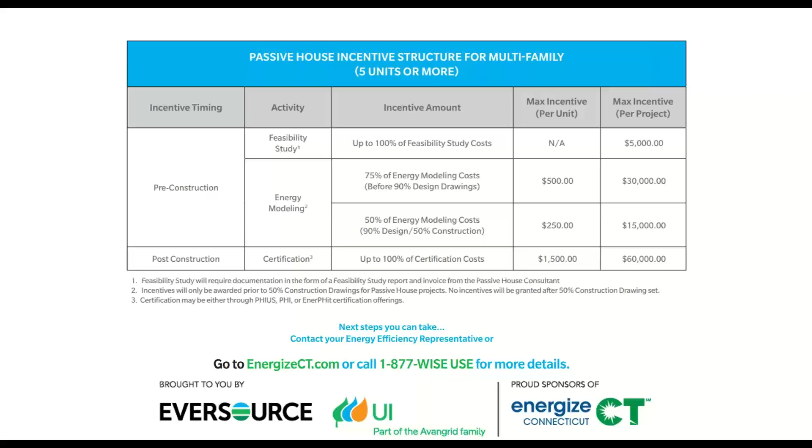Next one: the all-electric incentive is for both single-family and multifamily buildings. It offers 2 levels of eligibility with specific design and performance requirements associated for each, and has incentives ranging from $1,500 a unit for multifamily all the way up to $10,000 for single-family homes.

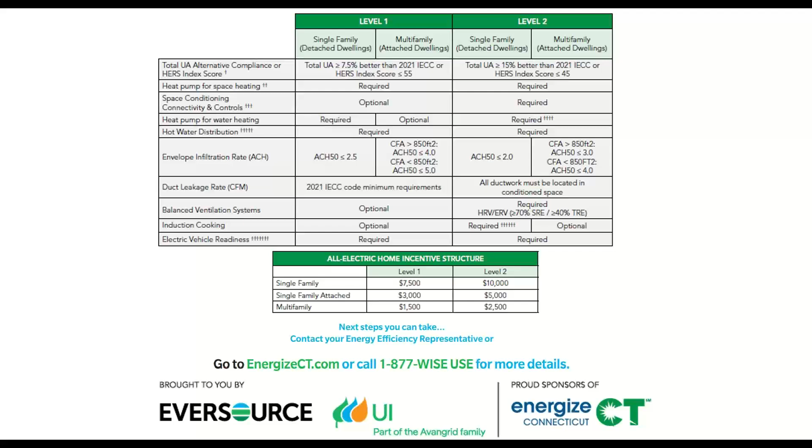Our goal is for everyone involved in the construction of residential buildings in the state of Connecticut to be aware of these incentives. So if you're interested in learning more, please visit our website or contact us directly.

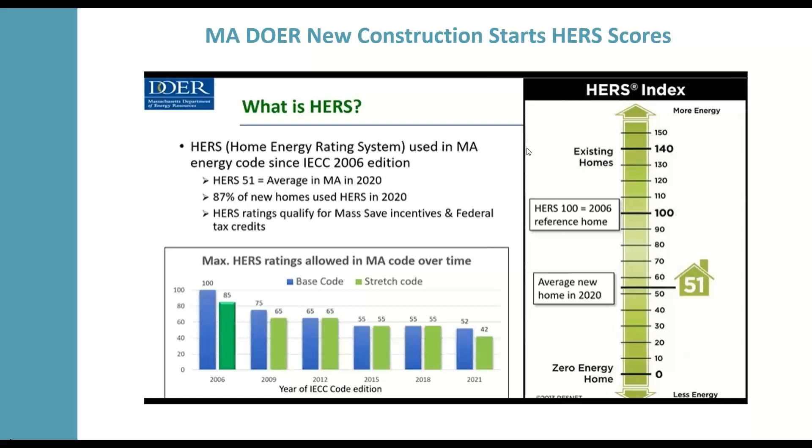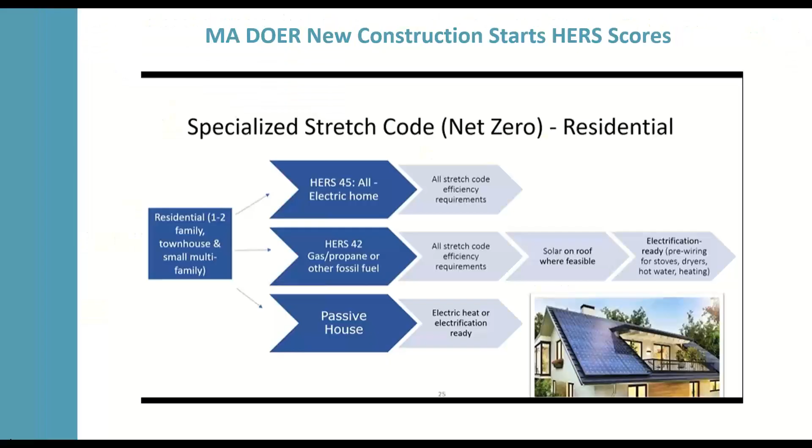And it's not that rare of a story. When I said the best performing homes are in that 30 to 40 range, that's before we're taking renewable energy into account. You put solar panels on the roof of those homes, and now they can provide all the energy they need. In some cases, they produce extra power, more than that home needs. We call it net positive, and it's amazing. Can you imagine, instead of getting a utility bill, you're actually sending the utility company an invoice for the power you're producing and sending back to the grid, and they pay you for it. It's amazing what's going on in the marketplace right now.

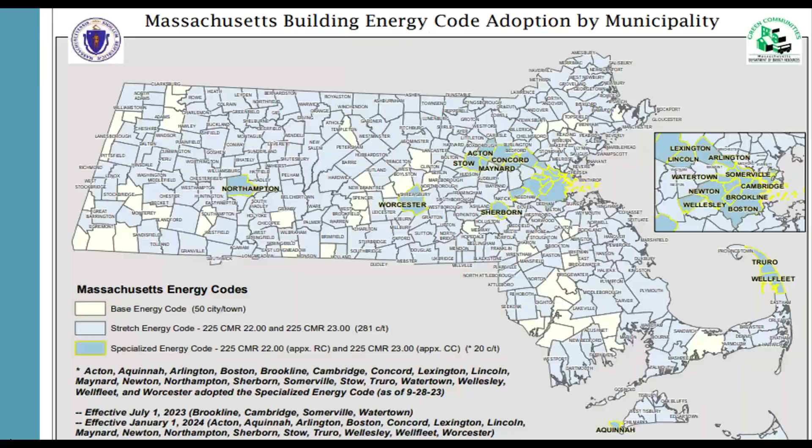So I was just going through a few different slides here. We have a few about some code changes in Massachusetts. I'm going to skip over that for a moment—we can come back because there's some code discussions we can have around the building code for folks who are interested. But I want to highlight this and talk about the growth we've been seeing. Today we're going to go between a few different terms: high performance, passive house, and more specific passive house terms like PHIUS.

High performance, we'll give a definition later, but we simply usually mean energy performance—homes with a lower HERS score would be a high performance home. Passive house is a specific certification you can achieve when a house has significantly low energy use. PHIUS is the largest certification body here in the US for certifying those homes. So when we say a house is PHIUS certified, that means it went through a passive house certification.

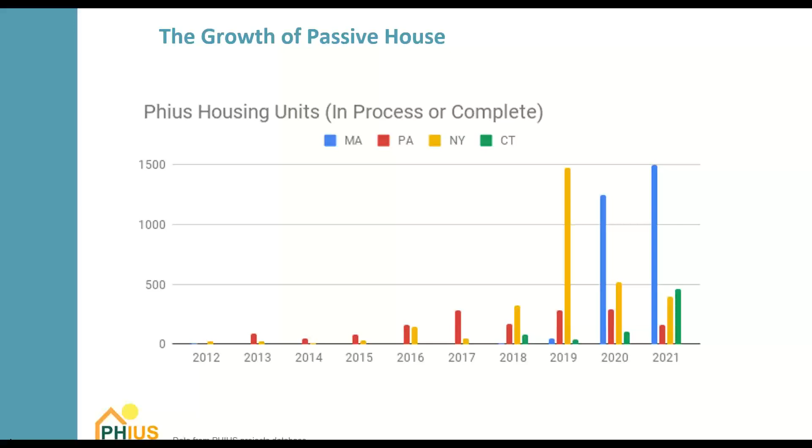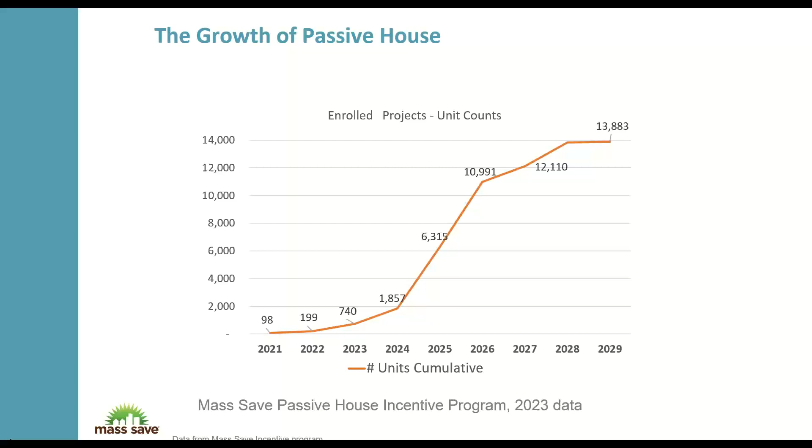So we expect Connecticut to experience similar growth in passive house due to the incentives that have been rolled out there now through Energize Connecticut. I don't have that data here to share with you today, but I hope in the future we'll have it and can show you this dramatic increase in passive house projects in Connecticut due to those incentives.

I have a couple slides here. I just want to talk about overall costs. There are a lot of questions that come up around building these higher performing buildings - does it cost more to build them? Maybe we'll save some money in the operation of them, but what about that upfront cost to actually construct them?

And they tracked where this came from. Some of this incremental cost came from using a higher quality ventilation system, some came from using better windows. So that might be where they saw some of the costs. But this is what they experienced, and this data is now actually a couple years old. We haven't gotten to the point of having concrete data yet, but what we're hearing from projects under construction is that this number is getting closer and closer to 1%, closer to 0%. Basically, passive house is becoming just another decision a project makes, not a huge cost driver.

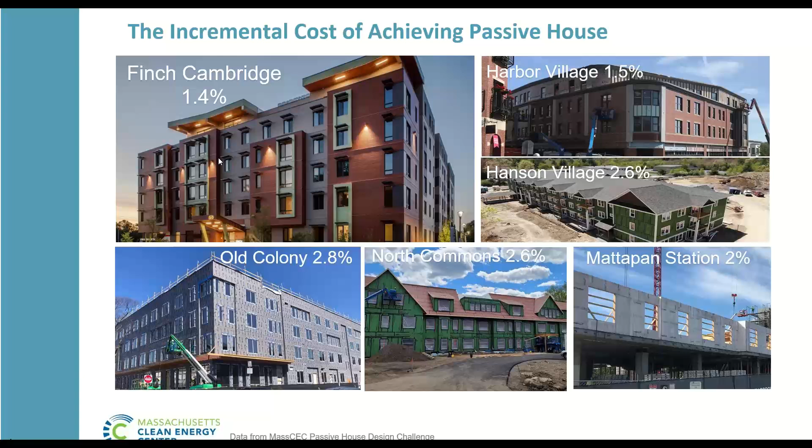Some of these projects actually noted that. In fact, the Mass CEC put a report together of these projects where they listed what cost more and what cost less. The HVAC system, not the ventilation system, but the heating and cooling system is where they saved money. Pretty incredible, just because they were able to have a smaller size heating and cooling system.

I have a couple more pieces of data as well. This is Pennsylvania. So if you guys noticed on the graph a little bit ago when I was talking about the four Northeast states that are leading the way, Pennsylvania is one of them. Part of that is that Pennsylvania took one of the first steps to incentivize passive house projects, specifically projects being awarded affordable housing financing through the PHFA, the Pennsylvania Housing Finance Agency.

So what we have here is some data showing you the cost of those projects, comparing the cost of projects that went through affordable housing financing that were passive house compared to the ones that were not passive house that went through this financing. And what you're looking at on this graph is... oh sorry, I have to move something on my screen so I can see.

The ones in sort of your orange color were the passive house projects that were awarded funding. The ones you're seeing in gray color are the non-passive house projects that were awarded funding. You're looking at the costs on the Y axis, so cost per square foot, and the square footage on the bottom, so you can see the size.

But the main takeaway, if you look at this, is the scattering of it. Passive house projects are all over the map, just like the non-passive house projects are all over the map. The reality is passive house was not the main driver of costs in any of these projects. Some of them were more expensive, some were less expensive.

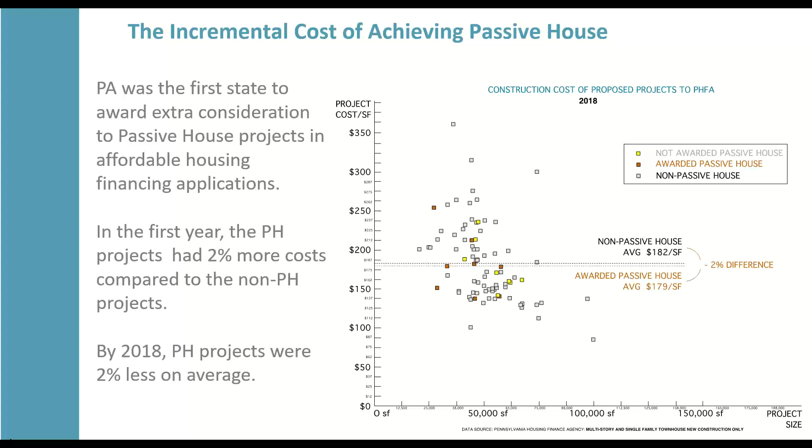Maybe you might be using some newer materials, and we'll talk about some of that. But a lot of it is the contractors, the trades, they get excited about this because their job matters a lot more than it does on a typical project. The quality they put into it makes a huge difference. Well, getting the subs on board, the framers, everybody has to be on board with this stuff.

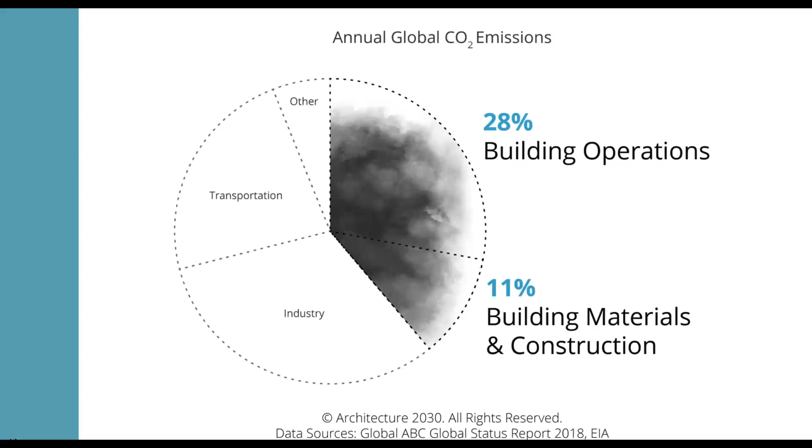This gets a little bit more into the buildings we were talking about. We're diving into building operations and building materials. So when we say buildings use almost half the energy, this is what we're looking at. This chart is specifically showing global emissions as opposed to US emissions, but you can kind of see it there.

So what I want to get into a little bit here is what I hinted at earlier, where are we focusing on in buildings? Because I don't want to make it seem like we're asking homeowners to change the way they live or to use less energy in their daily lives and what they experience. We're trying to make their home more efficient. And you can see why.

This is the Northeast, so this includes Connecticut and the whole Northeast region. How do homes use energy? The orange piece of that pie is space heating, that's nearly 60%. So in a residential single-family home in the Northeast, around 60% of the total energy we use goes to heating our home. That's it, it just goes to heating. Whether we're using our natural gas boiler, an old oil system, or even a new efficient system, average is 60% of our energy is space heating.

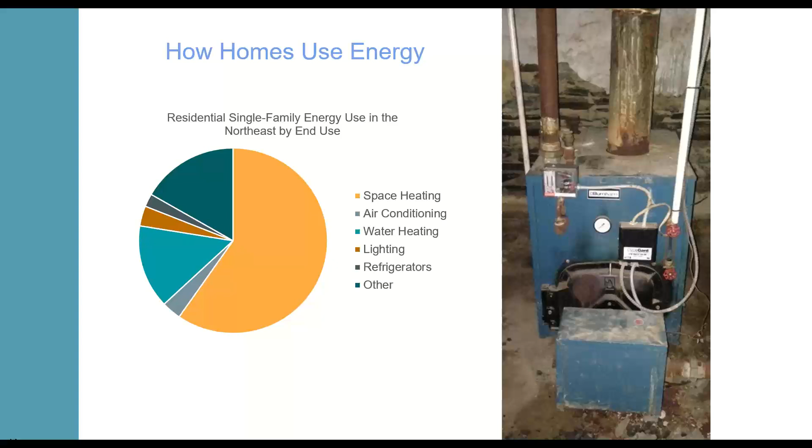And then you can see a little sliver of gray, which goes to air conditioning systems. And then we have water heating, of course, which takes up a large chunk as well, and a few other things. But if we really want to reduce the energy demand of our buildings, what you can see by this chart is we're not going to focus on lighting, we're not going to focus on refrigerators and other appliances. What we are going to address is space conditioning, and really in the Northeast it's heating more than anything else, reducing the energy we need to heat our buildings.

Can I just make a comment on that, from a real estate perspective as well? We've been in a very aggressive market over the last 3 or 4 years in particular, in which buyers have no leverage in the real estate transaction. They're competing against multiple offers.

They oftentimes have no opportunity for a home inspection. They waive their right to a home inspection just to compete in this marketplace. I've even seen home buyers waive their right to a mortgage contingency, going straight to lenders. Crazy stuff just to land a home in the Northeast.

Any buyer could look at this system and say, that's at the end of its natural life, this natural gas heating system that's here. What am I going to do when that thing goes out? It's not going to be very long before I have to deal with that. I don't need a home inspector to tell me this, right?

So one of the things that gives my buyers a great sense of relief is the incentives out there, including in Massachusetts, we have the heat loan, which is 0% financing for energy efficiency improvements. If homeowners know about these incentives through the IRA or the Energize Connecticut programs, you can give your buyers real peace of mind that there's a way to approach this after they own the property, after the point of sale, by giving them the resources to get the job done right and take advantage of ridiculous incentives to handle some of these readily apparent problems.

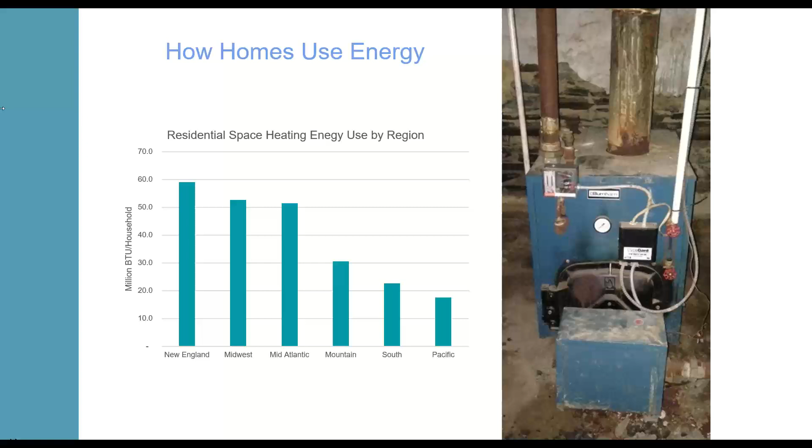This chart shows that same data but compares different regions, and the takeaway should be clear: New England uses the largest amount of space heating energy. The numbers here are in million BTUs per household. New England homes on average use nearly 60 million BTUs per house for space heating, more than any other region. That's why practices like passive house and other high performance building standards have taken off here more than in other parts of the country, because we need it here more.

Now we're going to get into high performance standards and rating systems, because there's a lot out there. I imagine everyone on this call is familiar with LEED or Energy Star, but other standards and rating systems exist too. They all try, in their own way, to improve buildings and homes, provide a standard to measure against, and a way to certify that a building meets that standard.

Most folks are familiar with LEED. It has a checklist of things you can do during design and construction to meet requirements and become certified if you achieve enough points. Those points cover a wide range of categories: energy use, site treatment, water use, and other sustainability aspects. So LEED becomes a holistic sustainability standard, covering a lot of ground.

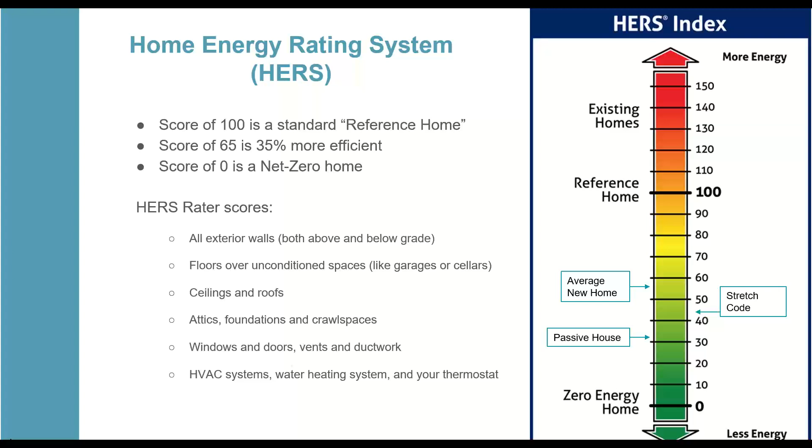So LEED can sort of be all over the map in terms of energy performance. Passive House, and the reason why it's become more of a well-known standard and more widely used, is because it focuses specifically on energy performance. It zeroes in and sets criteria for annual heating and cooling demand. So how much energy are you using in the building to heat it? How much energy are you using to cool it?

It also sets specific standards for whole building air tightness - how airtight is that building envelope? We want to measure that and have a goal for what we want to achieve. And then it also sets standards for source energy demand - that's just a way of talking about overall energy use of the building. So if we take heating and cooling demand and add every other source of energy in the building, we want to make sure that doesn't go over a certain limit as well.

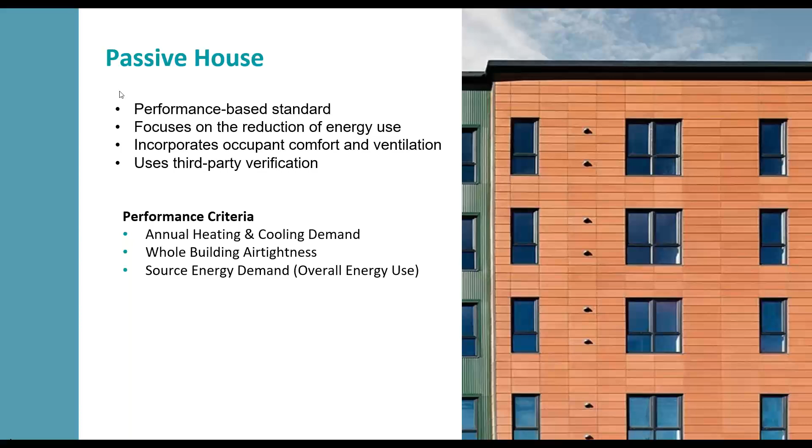But it was based on ideas that had started to be implemented way back in the 70s with concepts around super insulated homes. That worry of, well, homes need to breathe, that really came out of these original super insulated homes, because in a lot of cases these homes did not have the modern ventilation systems we use now. So they may have encountered problems with that lack of airflow concept that we don't experience now. But the main ideas of Passive House came from that.

The first use of Passive House in print was actually a home in Shrewsbury, Massachusetts, right here in New England. But then Passive House sort of came around the mid-90s, started in Germany as a European standard, and then expanded here to the US in the 2000s.

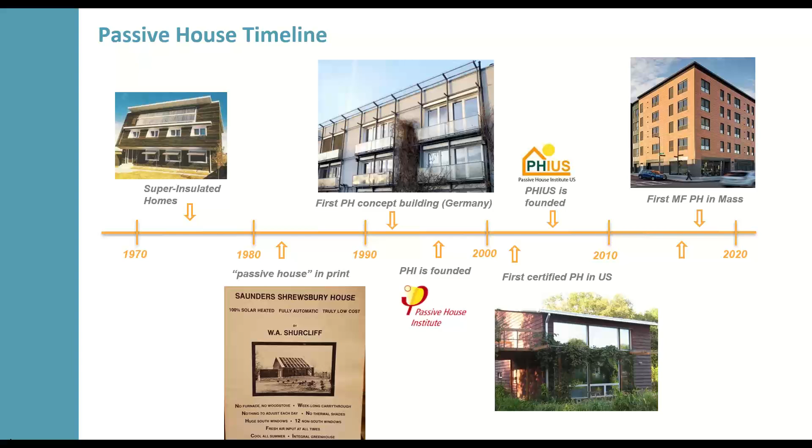So this stuff has been around in the marketplace for a while, but it's really the way Passive House has put this together in terms of a certification setup and to move the market that is really impressive here.

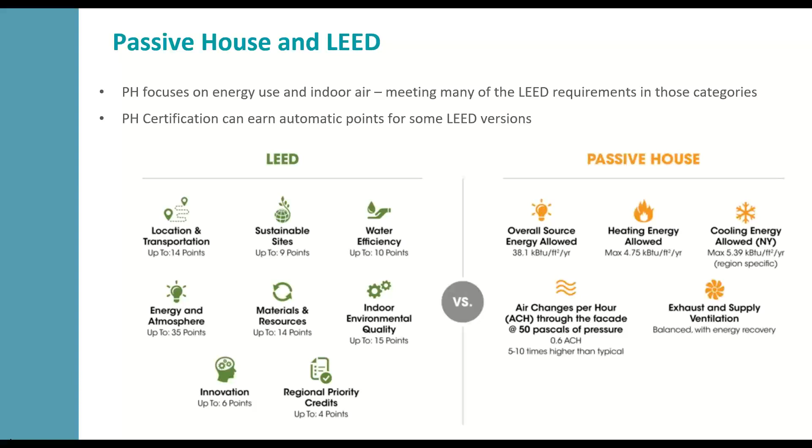So Passive House and LEED can be very complementary to one another.

And this is showing you PHIUS specifically, which is one of the two Passive House certification platforms, PHIUS and PHI. This is showing you how PHIUS also incorporates other standards that already exist.

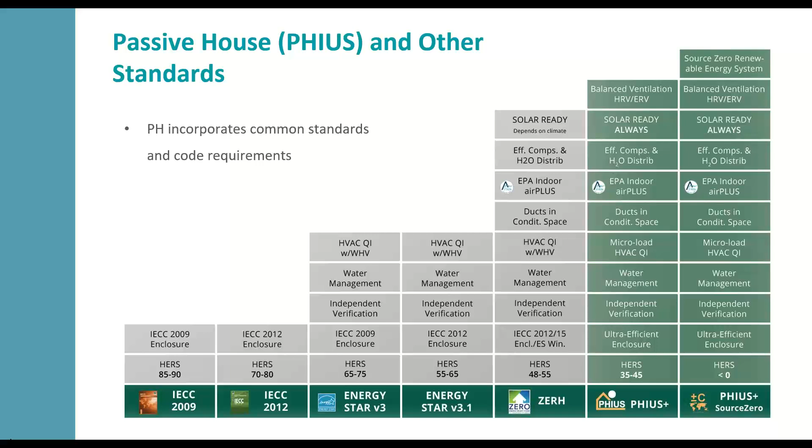It incorporates the base building code, Energy Star certification, Zero Energy Ready Home certification. It also incorporates Water Sense, which is, I believe, an EPA program. So there are a few other standards that exist out there that if you're building a new home, you may need to take into account. PHIUS tries to incorporate all those things, so it's not competing with these other standards. It's not trying to cause confusion or complications. It's trying to build these other required things into the system. Make it easy.

So I talked a lot about what Passive House does. Well, one of the things is the air tightness standard. Some of you this might not mean anything to. If you don't understand what air changes per hour at 50 pascals of pressure are, that's okay. But if this does mean something to you, you'll notice it's pretty dramatic. Generally, the base building code asks for around 3 ACH 50. This is just a measure of how airtight that building is. Every building has to meet some type of air tightness, but 3 is not a very airtight building—it simply has some air tightness. Passive House requires that to go down to 0.6 ACH 50, which is a pretty dramatic improvement. You'll notice that's not completely airtight, but it's a pretty dramatic improvement.

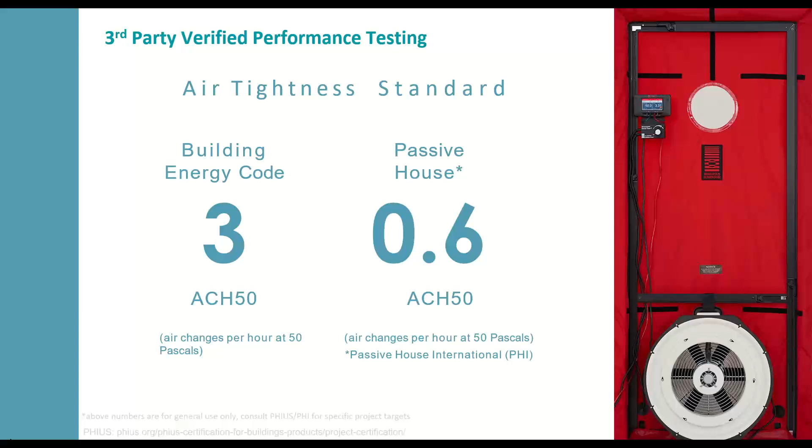Exactly. So we translate all of the stuff into benefits, which is clearly I think the main benefit you'll experience here is that top line, third-party verified performance testing. These buildings are tested. We know how they perform because we measure it and test it. Other buildings don't have that. So that's one of the benefits you get from something like Passive House certification—you know what this building is going to achieve, because somebody else tested it for us.

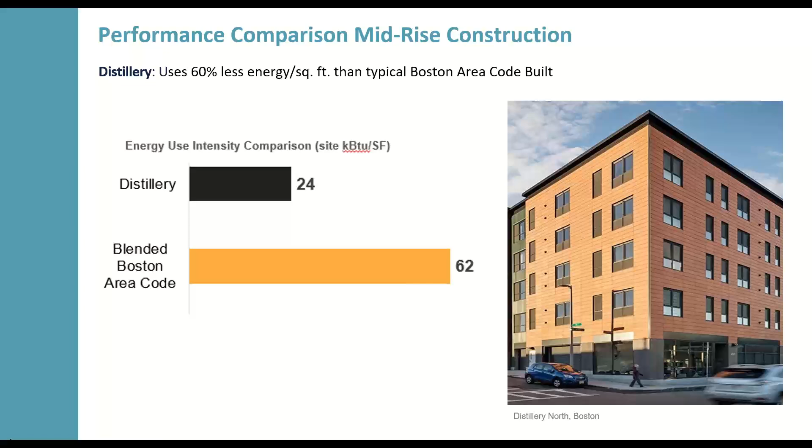I'm just going to show some performance comparisons. So this is energy use. These next few slides are just so we can all understand when we say a passive house uses less energy, what does that mean? This is a multifamily passive house building in downtown Boston. The numbers we're looking at are something called EUI—that's just the total kBTUs of energy the building uses divided by the square footage of that building. This building, called the Distillery, has a 24 EUI. The general mid-rise construction in the Boston area averages 62. So this building uses 60% less energy than a comparable building in this area.

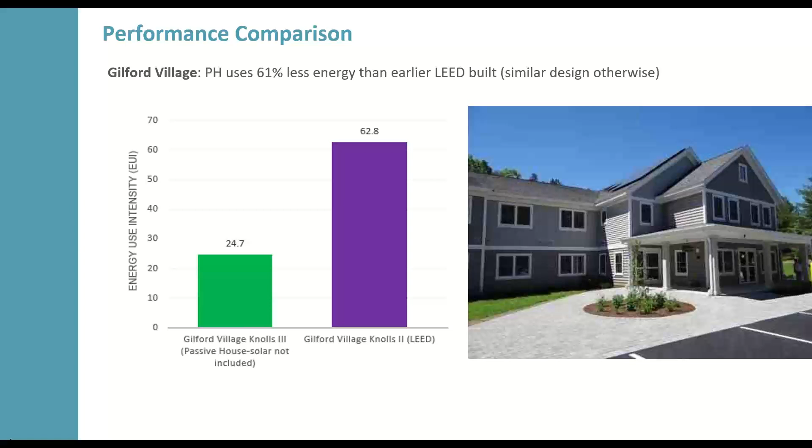This is a project in New Hampshire, built in 3 phases as senior housing. The first phase we don't need to worry about. The second phase was built to achieve LEED standards. The third phase was built to achieve Passive House. Otherwise, they're similar—similar number of units, similar size, architectural features. They were designed pretty similarly, except the third phase went ahead and achieved Passive House. That third phase uses 61% less energy than that LEED certified second phase. So pretty dramatic improvement just by going to Passive House.

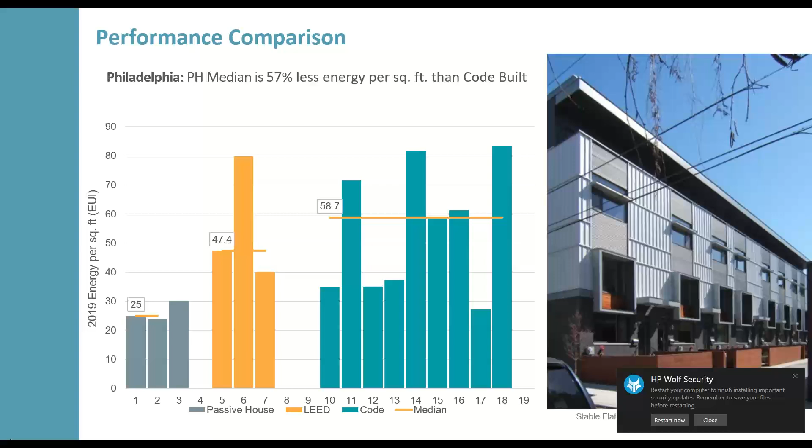With Passive House, you're not going to have that variability because that performance is the requirement. You have to do it. So it's not a guess to say maybe this building will be 57% better improvement.

No, we know it's going to be. And that verification piece is important in the marketplace too, because every realtor, every builder, if you ask them, built the best homes in the face of humanity. But we really don't know that unless it's verified. And I think the third-party verification part of this, the performance testing, is something that in doing open houses, we can make buyers aware that this is third-party verified.

And there's some real value to that, compared to the typical builder out there. Exactly, that verification is so critical. And it allows us to hopefully start to include data like this in the MLS and other resources so people can actually see this data that's been third-party verified.

This is showing you three different smaller projects. These are all Massachusetts projects. The one on the bottom is that house in Wayland we talked about. The one on the top is a net zero passive house in Lincoln, kind of a farmhouse style. And the one in the middle is actually a single-story office building in Newton called the Studio. So you can see how these buildings perform.

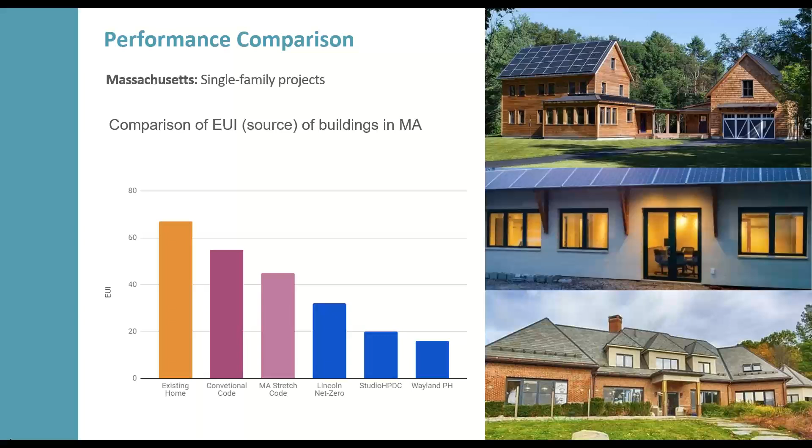One thing I'll note is the EUI in this case is without solar being taken into account. You can see the solar panels on the farmhouse and on that office building, so right now we're not accounting for those. If we were to account for the solar, the EUI of those buildings would be zero or negative something, because both of those buildings are net zero and potentially net positive depending on the amount of production. But not even taking the solar into account, you can see how much dramatic improvement in EUI. Pretty impressive data there.

So that was all about energy performance. And that really is, I think, the core of these standards of passive house and high performance buildings - reducing energy demand of buildings. But that's not the only reason to do it, and not the only benefit we see. There's many other benefits.

So one I'm going to talk about now is the concept of durability and resilience. There's lots of different aspects to this, but here's a few of them. One, it means you can shelter in place. We've all either experienced or heard about other people experiencing power outages during extreme temperature conditions. Maybe it's the middle of winter and really cold outside and your power goes out. Maybe it's the opposite - a really hot day in the summer and your power goes out and you can't use your AC or anything else. So sheltering in place means, can we withstand those conditions until they improve, until they're fixed?

These buildings are much better at doing that. I'll show you an example in one moment. We also mean these buildings are more durable and longer lasting. They're being built with better materials and better attention to detail. They're going to resist things like mold, rot, pests, water intrusion, and all of these things that can cause problems to buildings. They're just going to experience fewer instances of this, dramatically.

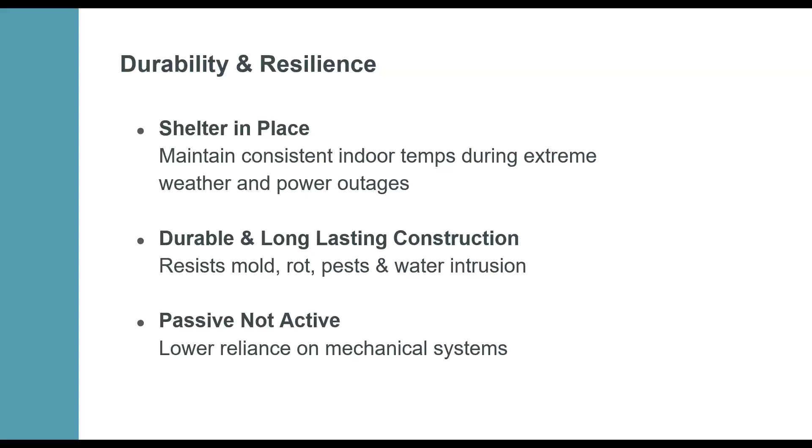Maybe they had a premonition here, but in 2021 a deep freeze happened in Texas. Similar things are expected to happen this coming winter and even this summer, unfortunately, in Texas. They experienced a power outage during this deep freeze - the power went out around 1 a.m. When they woke up in the morning, it was 9 degrees outside, that was the outside temperature. Their home was 62 degrees. Their heating system had not been working since 1 a.m., but their home was still 62 degrees. Their neighbor's house, not a passive house, was already down to 36 degrees.

And the power continued to be out for a while after this. Those neighbors were not able to stay in their home - that was not a comfortable living condition. But the passive house allowed these folks to withstand the duration of that power outage in comfortable enough conditions.

And this is what we mean by sheltering in place. We see similar stuff up here in Massachusetts. Last summer, we had power outages on really hot days in summer. No AC systems were working. Homes were becoming very uncomfortable very quickly, but passive houses were not. They were staying at a comfortable enough temperature.

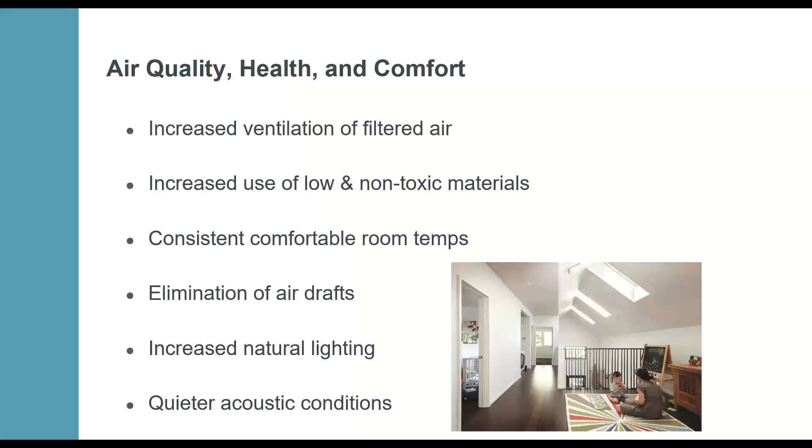And something else - every once in a while I go and tour some of these buildings and talk to the owners or tenants, in the case of rentals, who are living in them, and it never fails, they always mention how quiet it is. It's never a benefit that I think of as why somebody chooses passive house, but everyone living in one mentions that's a benefit to them - how quiet it is. So that's also one, don't forget to mention.

So if you're a realtor out there and you installed solar panels on your rooftop that cost you $20,000, you can take off in your next tax year 30% of that, or $6,000 off what you owe the federal government. That's just one example of the tax incentives out there. A good quick look at this stuff is to Google 'Rewiring America IRA calculator.' They have an Inflation Reduction Act calculator on that website where you put in just 5 inputs - you don't have to put in your email address or anything - and it will spit out very quickly what the tax incentives look like for your income bracket.

Check with your tax advisor before moving forward with any of this, and make sure your tax advisor is giving you consistent information. There are very powerful incentives out there for all of us to take advantage of. And if you as a realtor take advantage of it, you've got a great story to tell your future buyers and homeowners.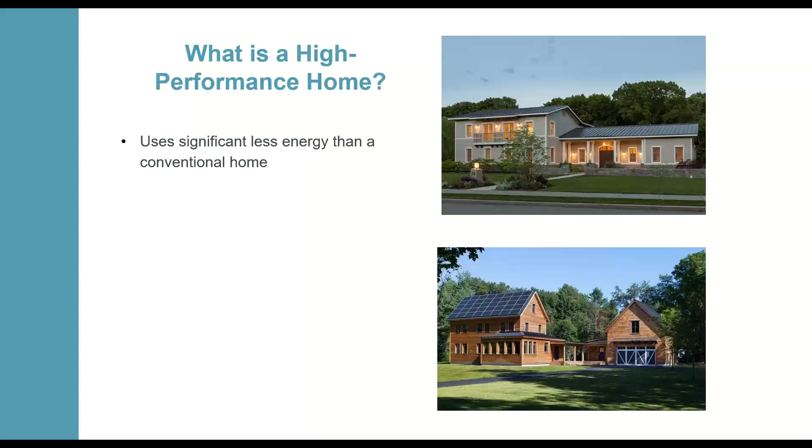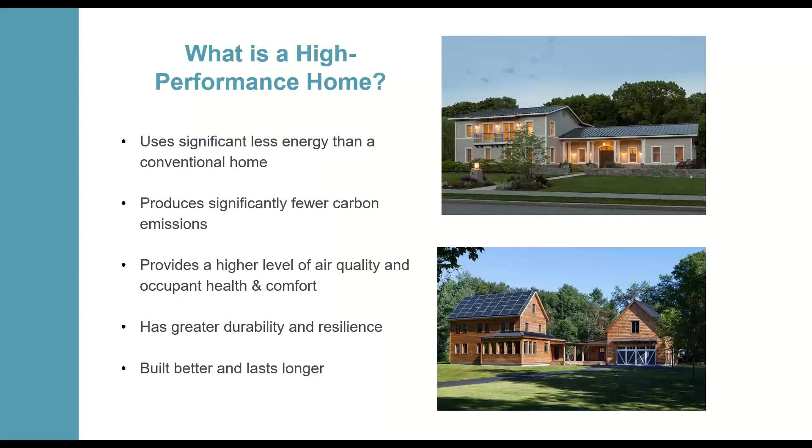I mentioned before what a high performance home is and how we're going to try to define it. What we're talking about is a home that uses less energy than a conventional home, produces fewer carbon emissions, and provides a higher level of air quality, comfort, occupant health, and has greater durability and resilience. You're seeing two examples on the right, but that's generally what we mean by high performance. Within that, we have standards like passive house which can define it much more critically, but in general, this is what we mean.

So what's wrong with conventional homes? They leak—that's the biggest problem. Hot air rises and escapes through the roof, through upper story windows and other places. It draws cold air in through leaks in the basement and elsewhere. Heat also conducts outward through materials with low thermal resistance, through places in your wall where you may not have adequate insulation. There are lots of ways for heat to escape homes.

What this means is in order to be comfortable, we have to constantly be producing a source of heat. This is a winter situation I'm talking about, but we have to constantly produce more and more heat because our homes are very bad at keeping that heat in.

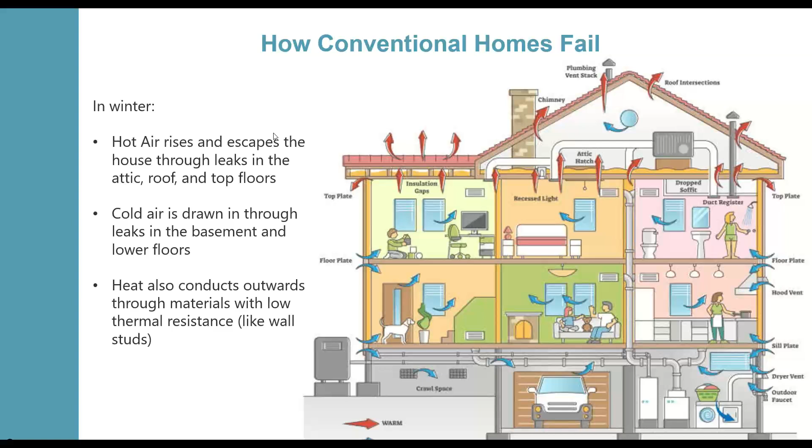But this can also cause other problems. Ice dams, folks might be familiar with. That happens when heat is rising through the roof. It's not able to stay in the home, so it rises up and melts some snow. That snow goes down to the cold eaves of the home where it freezes, and you get an ice dam.

We can also get mold growth. A lot of times people look at a wall and see mold growth or some type of water issue, and their immediate thought is there's a pipe leaking, some sort of water getting into here. That may be the case, but it's not the only way this can happen.

This is an example of mold growth from thermal bridging. Thermal bridging is a place where you might have material in the wall, your wood studs or otherwise, that aren't properly insulated, and heat transfers through them. You might end up with a very cold spot on your wall because of that, and that can lead to mold growth. So in passive house, high performance homes, we also try to eliminate this problem of thermal bridging through the wall.

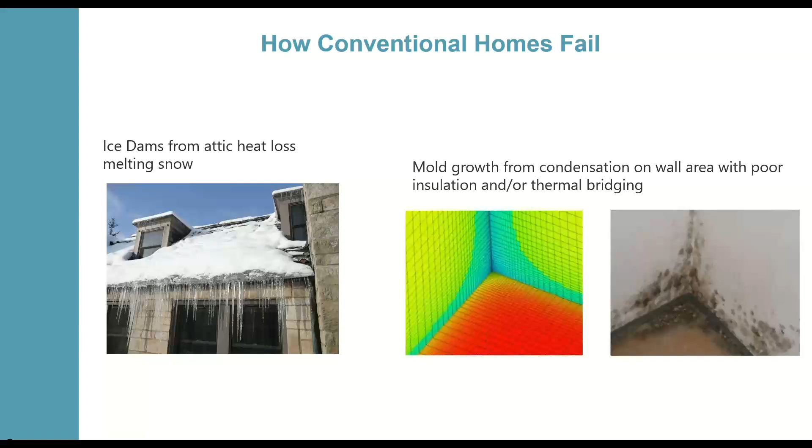So we're leaking energy, we're leaking money. How do we solve this? We solve this by building a better home, a high performance home. Simple as that. So what are the principles behind a high performance home?

Number one, use the building envelope to create a thermal barrier and air barrier. This reduces heat loss in winter, and it reduces air movement outside of the building, from the inside to the outside. Primarily this is through an air barrier and through some type of heat barrier.

There's lots of different types of air barriers. What we're looking at here is just one example of a wall showing an air barrier membrane put over the sheathing. They might have OSB sheathing on this wall, and they're going to put an air barrier membrane over the top of that, which helps reduce air movement through the wall. We also then have a heat barrier or thermal barrier.

This can be done through dense packed insulation in the cavities, so dense packed cellulose insulation or dense packed fiberglass. But that's not enough. We also want a continuous layer outside of those cavities going all around the building. This is called continuous exterior insulation. This can be different things, like foam boards, mineral wool, or now wood fiber boards. There's different things you can use for this, but we want that continuous barrier around as well.

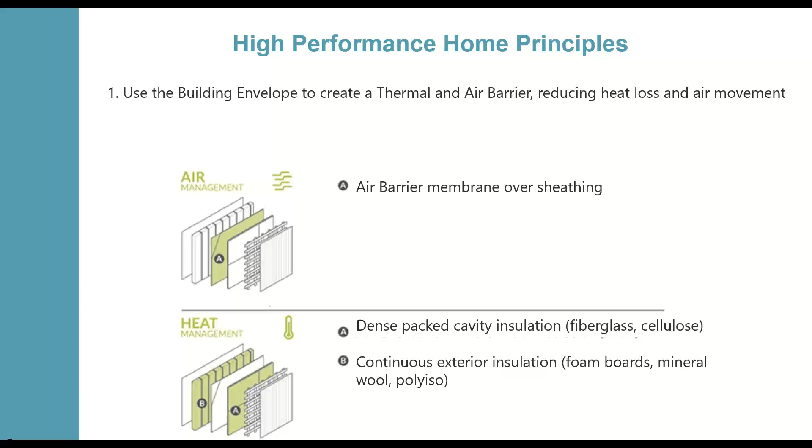So this is how we use the building envelope. And just to clarify, these photos are showing wall sections, but we're talking about this around the whole building. These practices are put into place around the roof, around the bottom of the building, around the floor, the basement, wherever you have the floor. We're wrapping the whole building in these type of things. That's the first principle, using the building envelope to create a thermal barrier and air barrier.

The second principle is using efficient heating and cooling equipment, so efficient mechanical equipment to produce the heating, the energy we do need. We'll talk a little bit more about these specific systems in a moment, so I'm not going to spend too much time on that right now. But we use the building envelope to trap the heat in that we produce, and the heat we do need, we produce through very efficient methods.

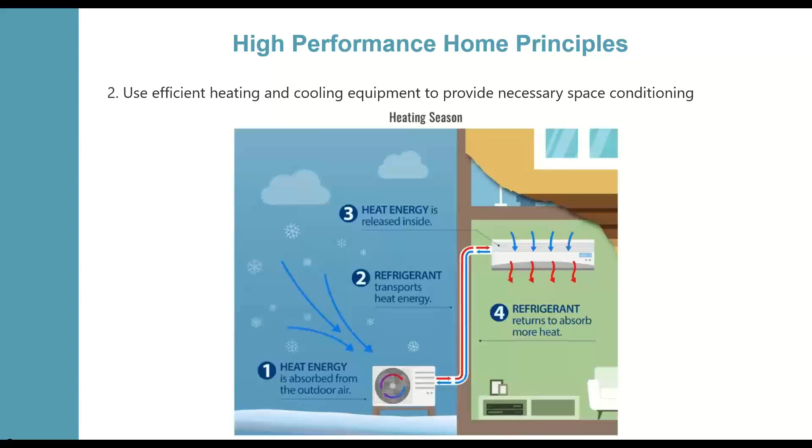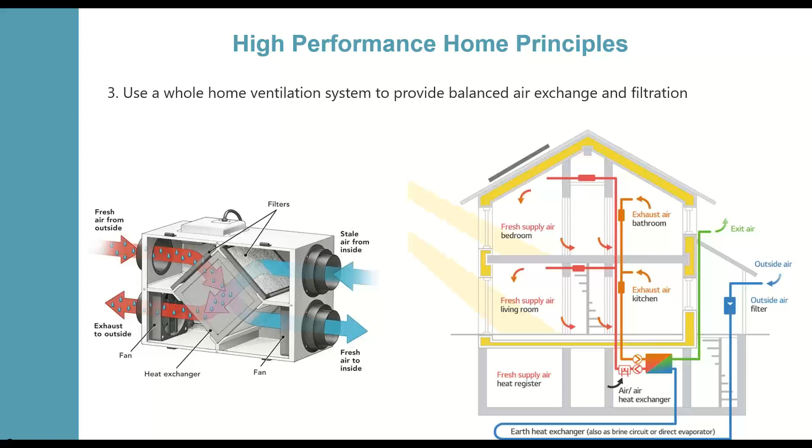The third principle is the ventilation system. This is the lungs of the building, this is how it breathes. So these systems are incredibly important, and we will talk a little bit more about this on a future slide. What you're seeing in the photo is something called an energy recovery ventilator, so we'll dive more into that in a little bit. But it's good to know this is a critically important part of high performance buildings and passive house buildings.

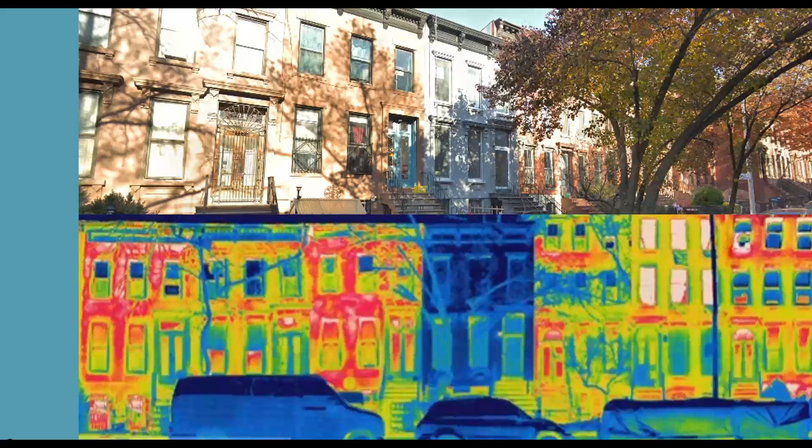So I just want to do a few more. This isn't meant to teach you how to build one of these buildings, it's just meant to give you an idea of what we're talking about. This is actually a multifamily building, that distillery project in Boston, but it's meant to give you a visualization of what we mean by this building envelope.

So they started by using advanced framing techniques. That's just a fancy way of saying they created more space for insulation in the walls, and tried to reduce the amount of extraneous lumber, extraneous wood headers and things that weren't needed. A lot of times traditional projects just go overboard on framing, putting in extra things that aren't really needed. So we start by eliminating what isn't needed.

Then we put sheathing over the top of this. This is using something you've probably all seen driving around construction sites - this green sheathing material called zip system. It's used in a wide variety of projects, not just passive house projects. It's like an OSB sheathing with a dedicated air barrier membrane already on it. If it's installed properly, with all the seams taped and everything else done properly, it works as a dedicated air barrier. So that green sheathing you see on projects, that's what they're using. There are other types of air barrier systems, but that's one of the popular ones.

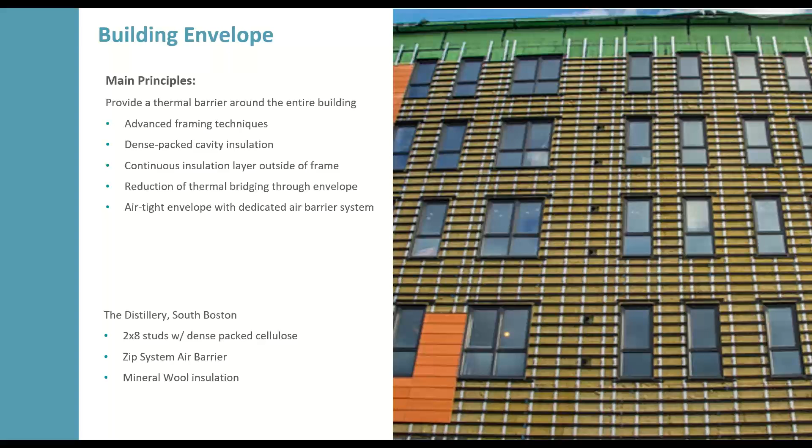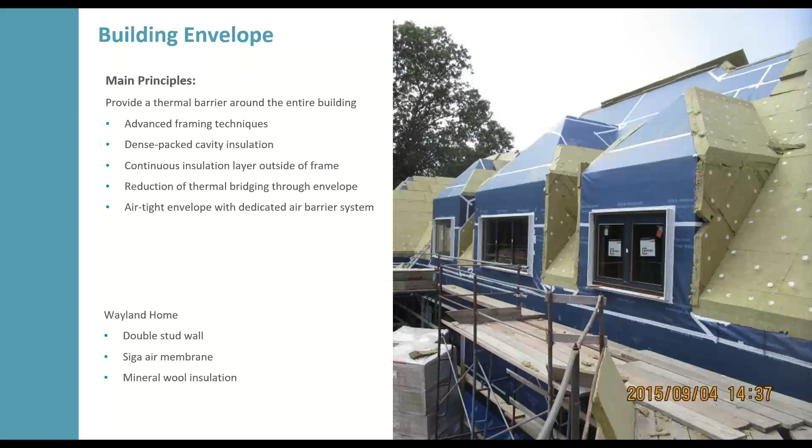Here's a single family home, this is actually that house in Wayland. This home used just a traditional sheathing material, like regular OSB boards, not zip system. For their air barrier, they used this blue material, a membrane system attached on top of the OSB. It works the same way - as long as it's installed right and taped properly, it works as a dedicated air barrier. So they wrap their house in this air barrier system, and then on top of that they use mineral wool as well, a very similar insulation system.

Here's some principles on air tightness we try to emphasize. Air tightness comes from having that membrane around the building that makes it airtight, but it also comes from proper installation and construction methods to make sure there are no gaps in that air barrier. The reality is we put lots of holes through our walls through construction - fasteners, plumbing and electrical systems all go through the walls.

So we want to make sure those things are installed properly, that they're taped and sealed. Going back to the earlier conversation about the importance of the trades, these details matter. This is nothing new for trades doing this, but it requires a greater attention to detail. It matters more - on a traditional project, having a little gap in the air barrier might not matter.

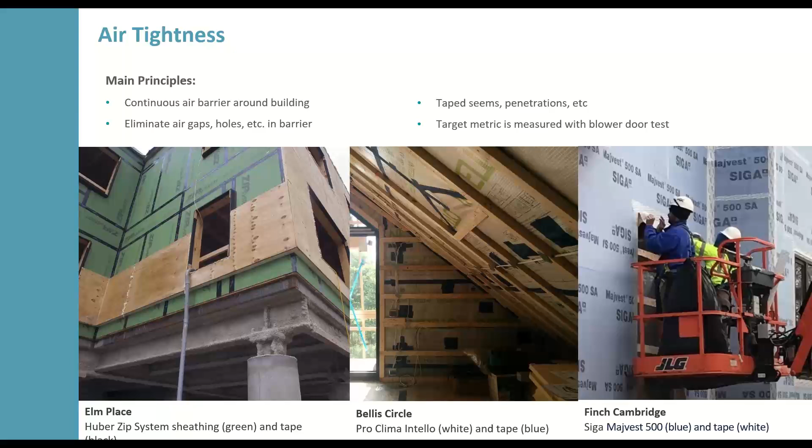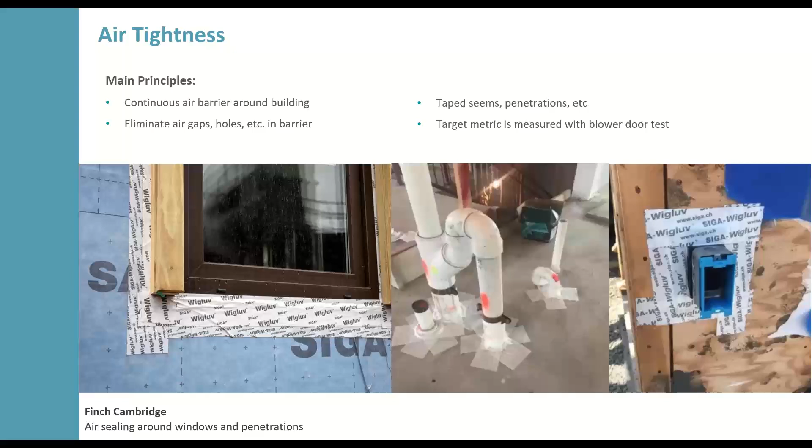Having a hole that goes through the sheathing might not matter in a regular home, but in a passive house or high performance building, it matters. They need to make sure this is done right and everything's doing its job. Here are some more examples of air sealing around windows, plumbing penetrations, and electrical outlets. It's attention to detail in a lot of these different places that makes the difference between a leaky home and a well insulated and sealed home.

I still see in the marketplace, driving around Massachusetts, builders using Tyvek. Nothing against Tyvek, it can be very useful, but the subs are stapling it to the OSB, and then a big wind comes up and it's flapping all over the place. You just wonder what the attention to detail is here.

That's exactly the kind of situation we want to avoid. We don't want too many staples going through that fabric, and we also want it applied tight. We don't want air blowing it around, because that means it's being applied loosely. We want it tight and flat against the whole thing. So that attention to detail becomes critical.

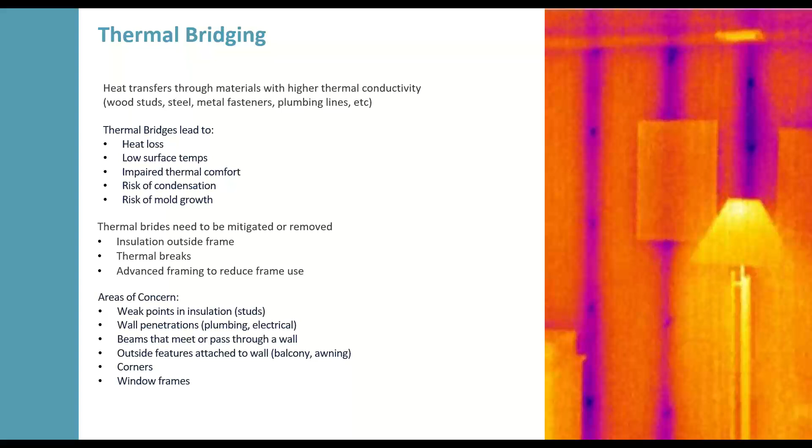Sometimes we can eliminate thermal bridges. There are places where maybe we don't need the wood studs to be as close together as they are. We can spread them out farther, going 24 inches on center compared to 16 inches on center. That means fewer wood studs in the wall, and fewer places for thermal bridges. Sometimes we can introduce materials called thermal breaks that go in between, maybe where a balcony sticks out, to break some of the thermal conductivity of the material. There are different methods used, but the point is, in these projects, we pay attention to thermal bridging and try to look for ways to mitigate its impact.

One pro tip for realtors: a great time to show a home is after you've had an inch of snow, because if you look at the rafters—this is kind of the opposite of thermal bridging—if you show homes in a neighborhood in Massachusetts, Connecticut, wherever, after an inch of snow and it's still below freezing, in some homes you'll see snow where the rafters are but no snow in between. 99% of the time, that's a good indicator there's no insulation in the roof, and the only thing protecting the heat is the actual rafters. There are lots of different ways you can use this information in informing clients about energy performance.

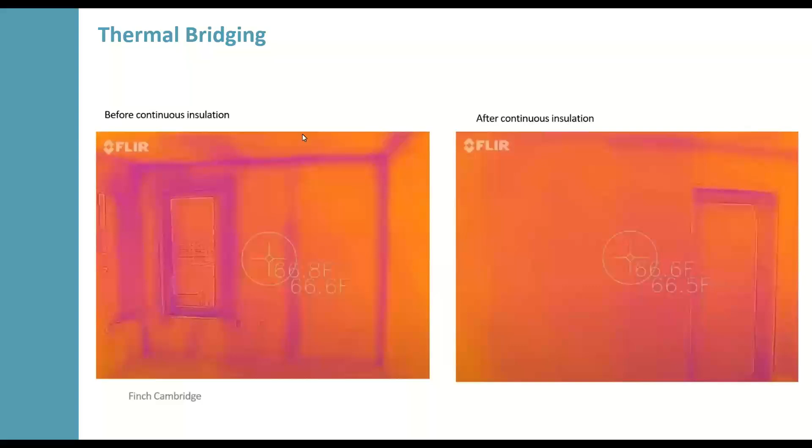This shows one of the benefits of that continuous insulation layer on the outside of the frame—it can help reduce the impact of those thermal bridges. On the left, before that—in this case it was mineral wool on this building—before the mineral wool was applied on the outside, you can see the heat going through the studs. After the mineral wool is applied, you can see the dramatic reduction. That's one of the reasons for continuous insulation on the outside, to reduce the impact of the thermal bridges that are there.

So I want to transition now into heating and cooling and talk more about the systems that we use.

So if you remember the principles I talked about, you can make it even clearer to just say there's two principles to a passive house: one, we're going to trap the heat in, and two, we're going to produce the heat in a very efficient way. If you want to boil it down to the most simple methods, that would be it.

So now we're going to talk about the heat and cooling that we do need. How do we produce it? The most common method is through air source heat pumps. In larger buildings, you might see something called a VRF, which is just a variable refrigerant flow, but in practice it's basically a version of a heat pump made for larger buildings.

These things are incredible, and I'm sure you have all seen these. They're used on a wide variety of projects. A lot of retrofits of existing homes will replace their heating system with these. I wish more would, but they're incredible. So just a few big key takeaways: they provide both heating and cooling, so they accomplish both of those goals.

They do that through electricity, so they work on electricity, not gas or any other fuel. The other main takeaway I would say about these is that third bullet point: they operate at 200 to 400% efficiency.

Just a quick background to give you guys an idea of how that works. Your natural gas boiler uses gas to produce heat, it burns that gas and heats up the air. These systems use electricity to power a compressor, and that compressor compresses air, which extracts the heat energy out of that air and transfers it to some coolant, similar to what you might have from your refrigerator.

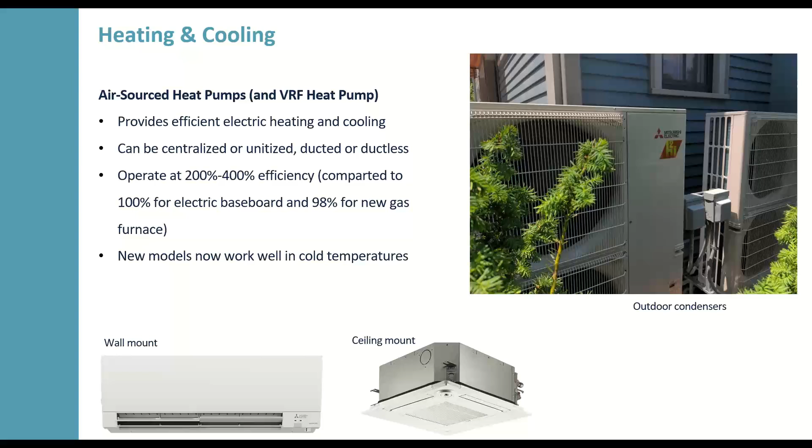So this is a little bit more about the ventilation system. What you're going to see is different terminology. You'll see phrases like HRV and ERV. What these mean is heat recovery ventilator or energy recovery ventilator. You'll see these used interchangeably a lot, and effectively they're the same thing, there's just some minor differences.

So the main difference is that the ERVs, the energy recovery ventilators, do a better job of dealing with latent heat or humidity. So in our climate zone here in New England, we tend to use ERVs rather than HRVs just for that reason. But in terms of the operation of these units, they're the same.

So a few key takeaways from ERVs: these are a balanced ventilation system, meaning the supply and exhaust air is equal in volume. So the air that we take out of the building is equal to the volume of air we bring into the building. We're not mixing that air together at all, that air stays separate, so the supply air and exhaust air are never mixing.

This system is always operating, so it's continuously running at all times, it's not cycling on or off throughout the day. It may have variable fan speeds, so you may have different speeds at which it might be transferring air, but these systems are designed to always be operating.

And they're providing fresh supply air passed through an air filter. So when we talk about indoor air quality, this is a really key reason why. It's because we're not only exhausting all that dirty air and getting it out of the building, but the air that we're bringing in is going through filters. And I know for a lot of folks, details on filters you might not know about, but for folks who do, if you know about MERV ratings, that's one of the ways we measure air filter quality. These systems tend to have a MERV 12 or higher put into them by default, so if that means something to you, you should know that's a high quality rating of an air filter.

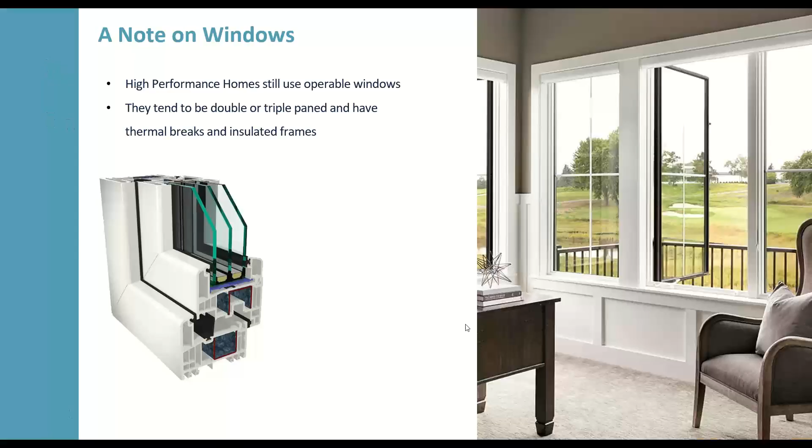The question was: do ERVs require a lot of space, especially in retrofits? So no, ERVs don't require a lot of space. That kind of ERV system will usually be installed in like a closet. Let me go back two slides here - this is an example on the right of an ERV that would be in a small utility closet type space. For a single family home, you're going to have one of those systems in a closet somewhere, and then you're going to have air ducts going through your house. So you will have some air ducts, but otherwise they don't take much space at all.

This one's a Zehnder unit, which is kind of the leader in the marketplace - that German company, I believe. But again, we're seeing U.S. manufacturers pick up the ball here with the ERVs as well.

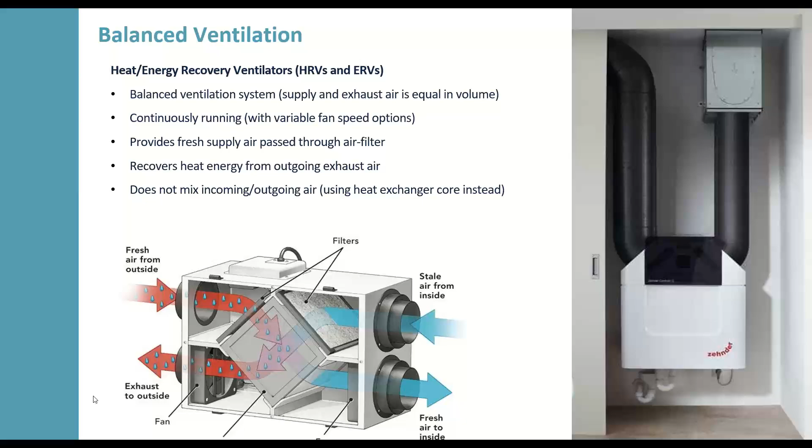All right, case studies. We're going to go through a few of these really quick, just to show you some projects that have been on the market and what to look through. This one is in Cambridge, Massachusetts. It looks like it was built to be an old Victorian house that belonged right on the street in Cambridge, but this is all new construction.

This was built to sell, built by the owner with the intention of selling it on the market once it was constructed. North Cambridge, completed in 2021, single family building, and it is a certified passive house, and it's all electric.

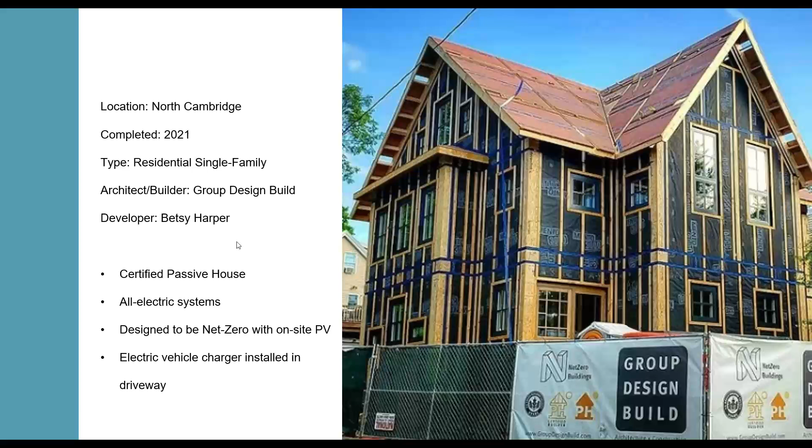Every system in this building is electric. It was designed to be net zero with on-site PV installed on the roof, so the idea was after a year it would be net zero. It also had an EV charger installed on the driveway, again intended to be powered by the solar panels.

Here you can see some construction going on. This was built using something called panelized prefabricated construction, which we're seeing more and more of in the passive house space. You can see on the flatbed truck panels that were built in a factory - wall panels, floor panels, and ceiling panels were all built in a factory and delivered to site, then constructed on site.

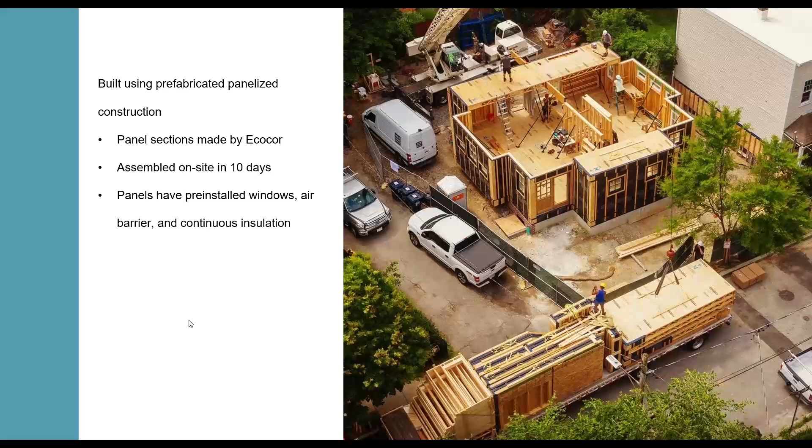This entire home, not counting the foundation work, but the actual construction of the walls and roof, was done in 10 days on site, because all they did is deliver these panels and assemble them like Legos. Incredible method to reduce on-site construction time and to ensure some quality control, because everything was built and tested in a factory before it was delivered.

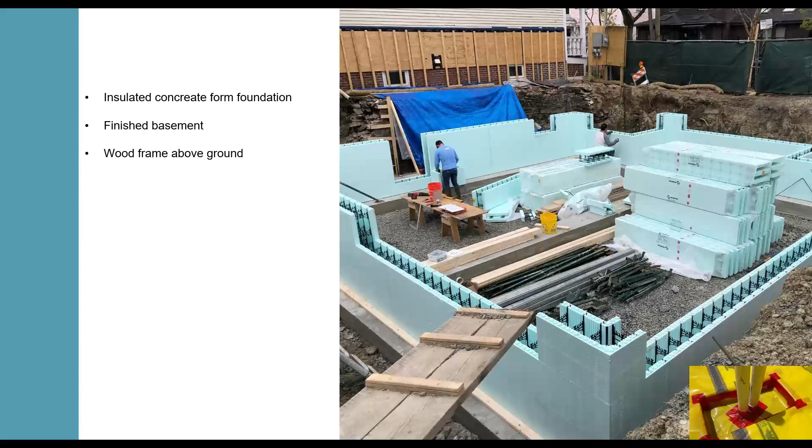Pretty incredible. Here's a little bit about the foundation going up. This is a common foundation we see in passive houses, where it's insulated concrete. You're seeing the insulation materials there, and then the concrete foundation will be poured into the middle of that. They used air source heat pumps.

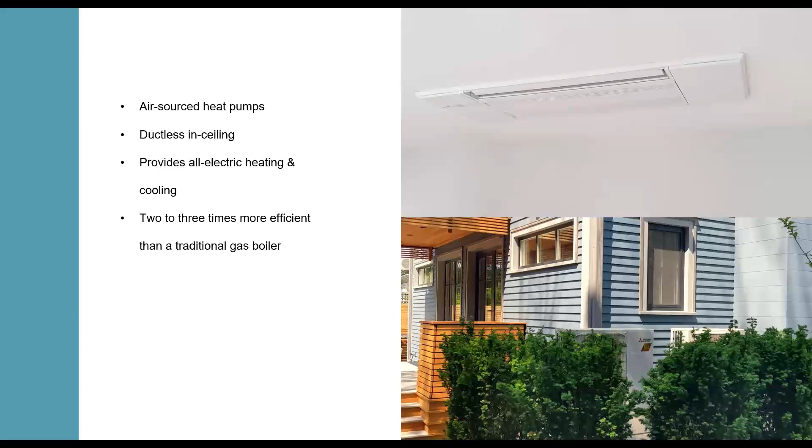You're seeing one of the images from the inside of the house - there's the heat pump compressors on the outside of the house, hidden by some bushes. They use an ERV, installed in their attic. I showed the one that might be in a closet, but you can have these installed in different places - I've seen them in attics, I've seen them in basements. Theirs was installed in an attic, and they had a MERV 13 filter.

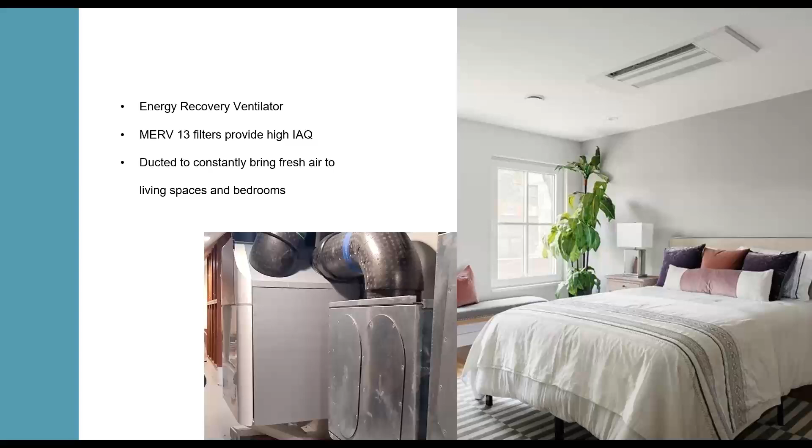They also use a hybrid attic - it was inside the building, inside the envelope of the building. The insulation and everything was done at the roof level. The attic was part of the conditioned space, so it was also used as a storage room as well as a utility room.

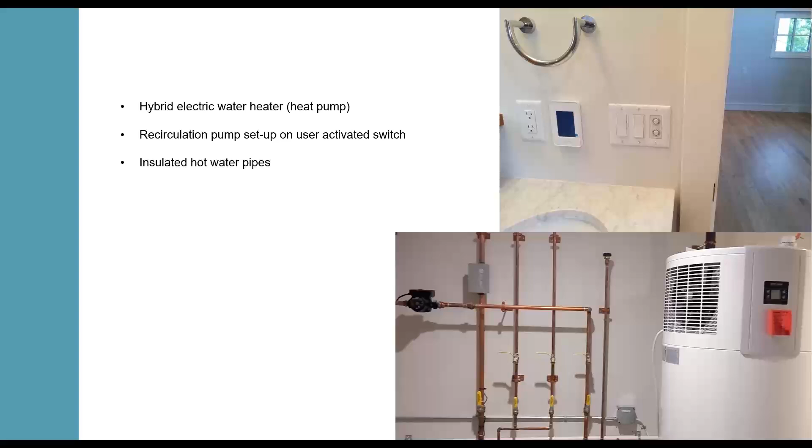Hybrid electric water heater - they use a heat pump water heater, which we're starting to see more and more of, especially in single family homes, for all electric water heating. Insulated pipes, a variety of things there, rooftop solar panel, and EV in the driveway.

But here's how it was marketed - it was marketed as a passive house and a net zero house. That was front and center in the marketing. It was on the market for a week and sold for over asking, and they did not shy away from this being passive house or net zero.

So that was recent, a couple of years ago. This one goes back a much longer ways - it's in Roxbury, right in downtown Boston. This is one of the first certified passive house buildings built in Boston, completed in 2014. It was done by an architect builder, a design build firm, Placetailor. You can see the building here.

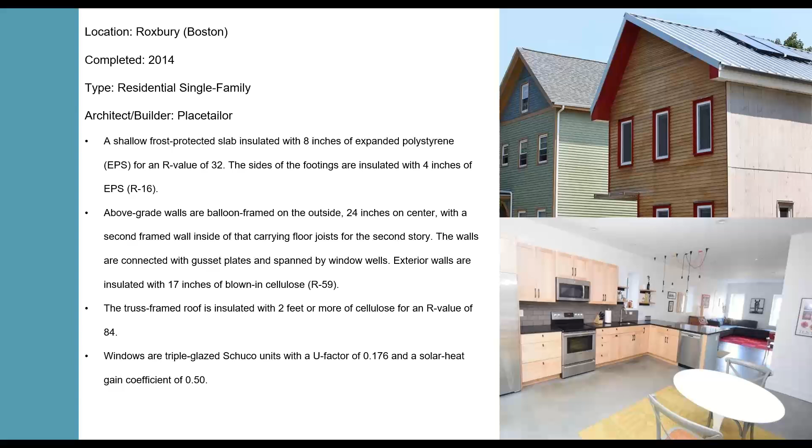So it wasn't maybe the energy efficiency of the technology, but really what they were getting at - and there's an interview in the Wall Street Journal where they get a little bit more into this - it was the comfort of the building. So when I talked earlier about it not just being the energy performance that is the marketing of these buildings, it's the comfort of them, the quality of life in them. That's what got these people to buy this house.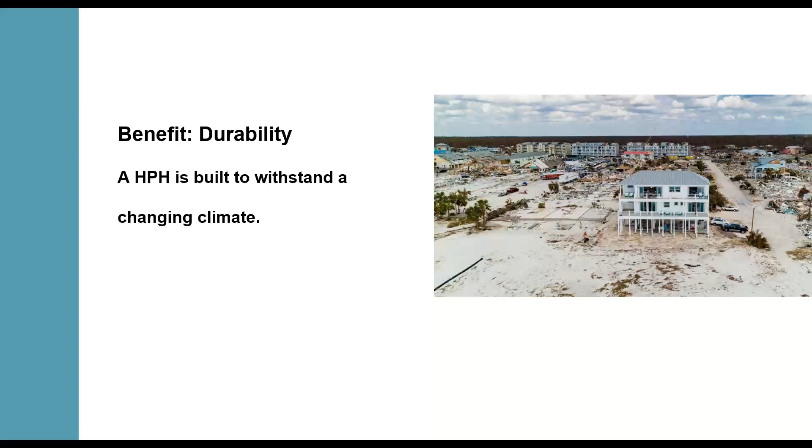Resiliency and durability is a really hot topic right now, and it's only going to become hotter as we continue through the rest of this decade, with temperatures increasing and more extreme weather events happening throughout the United States, whether it's wildfires, tornadoes, hailstorms, or hurricanes. It's going to be a big hurricane season, and extreme heat as well, which is becoming a huge issue if you're in Phoenix, Arizona, for instance. So durability for these homes is a really critical selling point.

Next one, resilience, same kind of thing. Resilient buildings, durable buildings mean the same thing, right? And Aaron gave a great example in Texas with that.

Comfort, like I said before, I'll ask my buyers at the end of the intro session what were some of the things you hated about the past homes you lived in. And invariably I'll get, oh, the home I grew up in, or the home I rented in college, there was always one room that was wicked cold in the winter and wicked hot in the summer. We can solve that problem with a better building envelope right now, and that's a fairly common problem in existing homes today.

That's very solvable. We can deal with comfort issues with better building envelopes, and that even includes existing homes. Just going to Mass Save for an energy assessment, letting them do some basic air sealing and perhaps an insulation upgrade, we can certainly get this done cost effectively these days.

Peace and quiet, this is a really important one. That development I was talking about earlier, Aaron, those four condos in the Fort Hill section of Roxbury, sold in 2017. The last one to sell, which is pretty common in our business, was the one nearest the street, because people are worried about the sound of cars going by. So as typical, this was the last one to sell, but I ended up getting two offers on it, and both of the buyer's agents remarked about how quiet it was when they submitted their offers.

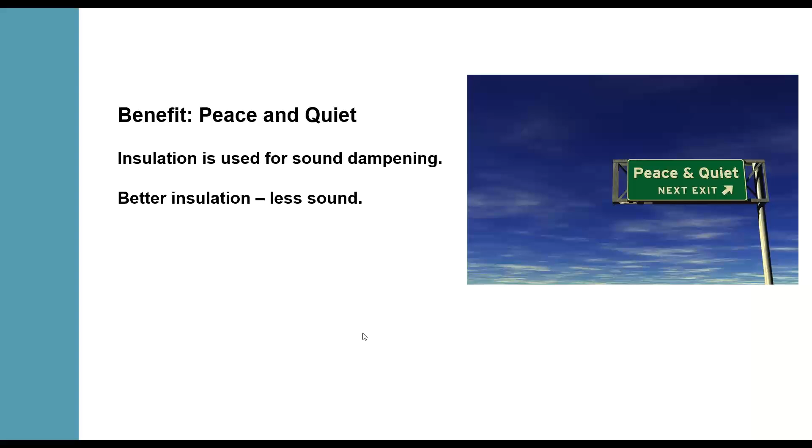Qualified appraisers that have gone through the Appraisal Institute's Valuation of Sustainable Buildings program can really add a number. It's not just about comps anymore. There are opportunities using things like a net present value approach or an income approach. So those homes with solar PV on them are actually producing income for the homeowner in terms of lower operating costs. A qualified appraiser, one who's gone through the Valuation of Sustainable Buildings program, can actually put a dollar number on that to add to the contributory value of the comps.

So let's say I comp out something that's worth $500,000. It's got a host-owned solar PV system with 20 years of remaining life in it. That might be $25,000 of additional contributory value that could save a home in a low appraisal. It could save a transaction. So this stuff is real. It's in the market, it's being implemented in the marketplace. It's to your benefit to really understand how this stuff works.